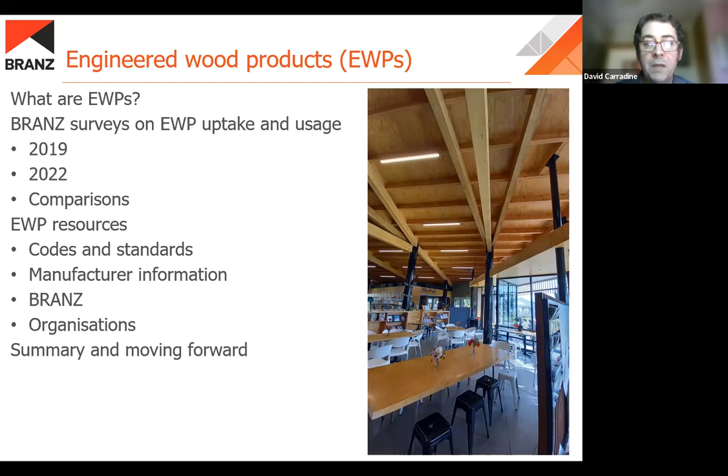We'll talk about current resources in terms of what's out there for engineered wood products, so codes and standards, what manufacturers are providing, a bit about BRANZ and what we've got on the go, and some other organizations that are out there as well. So we'll have a little summary at the end, and a nod to what we're going to be looking at in the future.

It's quite a range of timber composite materials we've got with engineered wood products. If we look primarily at structural applications, we're looking at LVL, glulam, CLT. We've also now got parallel laminated timber, which is like a panel product like CLT, but actually more like glulam done in a panel type format. That's being manufactured by Taranaki Pine, and I think Woodspan is the moniker they're using for that.

And of course there's finger jointed timber, which gets used in some of these different applications. So we've got a range. Some of the industries in New Zealand are quite mature, others are relatively new, but at the moment this is a pretty good snapshot of what we've got available.

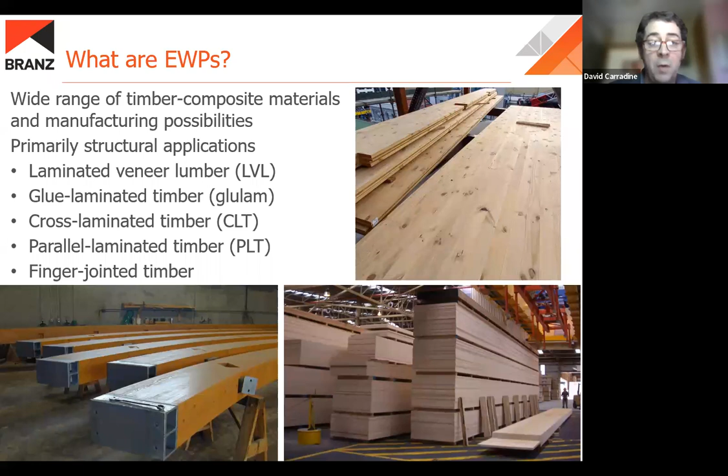There's also panel products - obviously plywood, oriented strand board which is used a bit more overseas but is starting to make some appearances, particularly with some composite products like structural insulated panels. There's strand board, which we do make here in New Zealand, as well as things like particle board and fiber cement. These all have different roles to play, some in more residential type structures, but I'd say they all have a role as well in multi-story timber buildings that we're seeing with a bit more regularity these days.

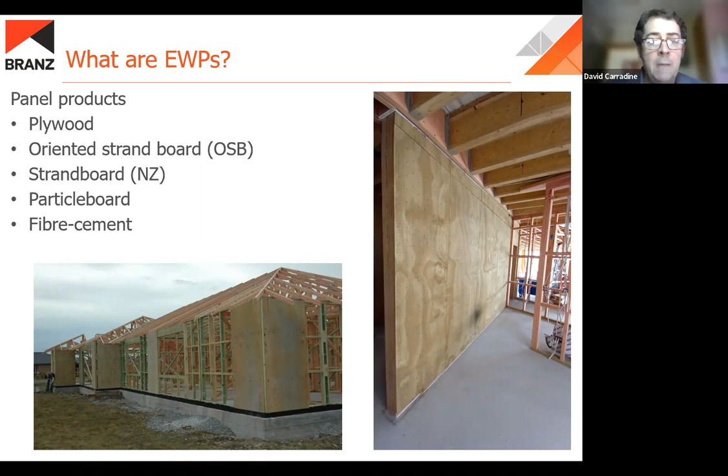As well as the products, we can also put those different products together and come up with products and systems, things like composite I-joists, which I'm assuming you're familiar with. There's structural insulated panels - if you've been keeping up with the TDS webinars, I did one on SIPs last year, and that's an ongoing research project.

There's wood plastic composites - we don't make too many of these in New Zealand, but they do come in from overseas and can have a range of applications. There's timber concrete composites, the PresLam system of post-tensioned timber, as well as a number of different types of stress skin panels and box beams.

Those last three all feed more into prefabricated type systems, even getting to the point where rooms, houses, and modules are being manufactured off-site and then assembled on-site. The different types of prefabrication certainly have opportunities there for using engineered wood products. Prefabrication is taking on a more prominent role in the landscape these days, as more and more people see the advantages of doing as much manufacturing off-site as possible, and fortunately engineered wood products fit very well within that paradigm.

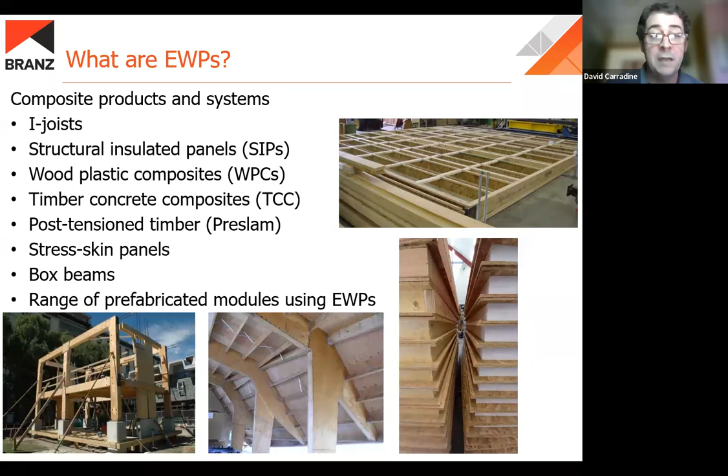So a little bit on these surveys. We did a survey back in 2019 that was reported on, and that was purely a BRANZ-facilitated activity. We got some help from others in the timber area to help with designing the survey and some of that sort of thing, but it was funded essentially through BRANZ.

More recently, in 2022, we did a follow-up to that. It was through a collaboration with the Mid-Rise Wood Construction Collaboration, which I'll talk a little bit about later. Essentially they wanted to replicate the 2019 survey, and in the end ended up getting some funding from BRANZ to do that, so it was a collaborative effort.

The questions were a little bit different, but very similar to the 2019 one. We ended up getting 265 respondents, which was good. We did have to make a couple of pushes for that, but in the end we cast a pretty wide net across the industry.

You can see some of the participants we heard back from in that chart to the right. We had an initial request for participation, and after having the survey open for about a month and a half, we really felt like we needed more respondents. So we did a second round of requests, asking even more organizations. We talked to Timber Design Society, SESOC, building officials and architects, and tried to get as many from the building industries as we could.

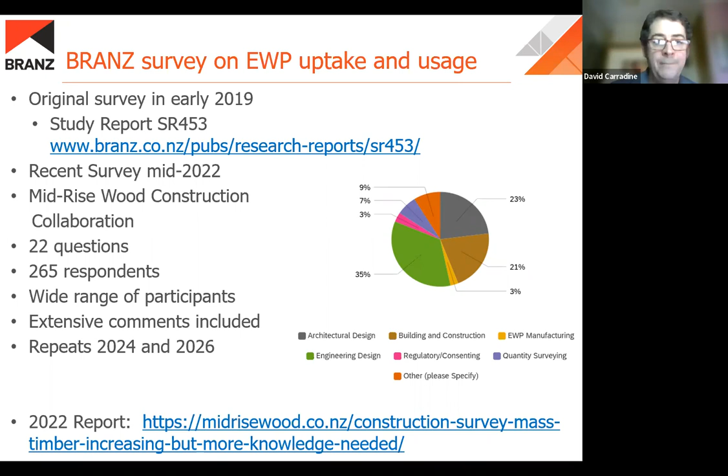As I said, the current, more recent survey was based on the 2019 survey. We tried to be a bit smarter about it. When we looked at not just the questions but also the answers we got, we were able to rephrase them and put them in ways that we think made it a little bit easier to take the 2022 survey, and also easier to analyze.

Surveys are one of those things: if you don't ask the questions in the right ways, the answers you get can be quite difficult to interpret. So I'd have to say we definitely made some improvements, and I certainly found the analysis for the more recent survey to be a bit more straightforward, which is great.

Again, the general theme of questions asked in the survey was a lot about barriers - what products are being used, how are they being used, are there barriers, if you're not using them why not, how can the uptake be increased, and essentially ways we could facilitate increased uptake of engineered wood products.

As I mentioned, we got lots of comments, so there were lots of opportunities for people to tell us what they thought. In the end we had to distill that down into some major themes, and they were very similar to 2019. So in some ways a lot of the things that were concerns back then still exist, but there definitely were some changes as well.

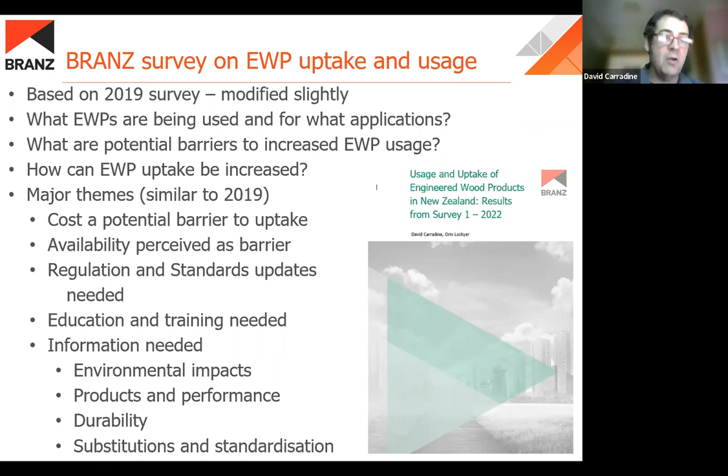The information people talked about, environmental impacts definitely seem to have a much more important, more prominent role, and that's no surprise considering the regulatory changes occurring over the past year or so. But definitely people want to know about the products, how they perform, how they can use them for design. Durability with timber products is always an issue, as well as how they can be substituted, and even some questions around standardization, which other industries probably do a bit more effectively than timber. Those were the major themes that came out.

From that, we looked at it and thought, what recommendations would we make? This was in collaboration with the Mid-Rise Wood Program, where we said certainly developing data on the economic implications of using engineered wood products, comparing them with other typically used materials, with more focus on multi-story building applications, because that seemed quite important in the survey results. People definitely want to know how they performed and how they could be compared, so that people can make more informed decisions moving forward.

Along with the environmental stuff, the comprehensive life cycle analysis and environmental impact data around engineered wood products. Fortunately more of that is coming all the time, but understanding the embodied energy as well as the operational - not just what carbon can be lowered using timber as a material, but also how timber buildings perform over their lifetime. It's getting more and more important to have a good handle on both of those, as well as the carbon sequestered, which for timber is usually a win, but understanding how that works and the different implications of different products.

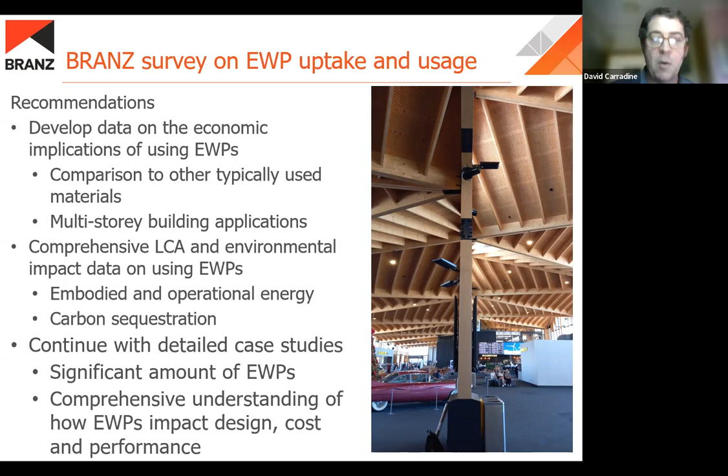What we're doing today, webinars, seminars - fortunately we're able these days to get out and about a bit more. I'm hoping you're all taking advantage of the range of opportunities out there. I know this year in particular there's an awful lot of events happening for timber buildings, so that seems to be happening in the background anyway.

In terms of recommendations, trying to engage with a wide range of building sector players. Sometimes it feels a little like we're talking amongst ourselves, that we're already all behind timber, but we need to widen the audience a bit and talk about specific applications of engineered wood products, demonstrations - not just case studies, but the tools available, and even guidance on using those tools, and sharing case study findings, which from what was said about upcoming webinars, is also happening.

Looking to the general public, building owners, end users, developers - folks that may not have timber on their radar as much and aren't already convinced, those are the ones we really need to try to share this information with. That's when having cost information and comparative data can be quite useful, because if people ask what's the difference between timber, steel, and concrete, having some of that quantified can be quite important.

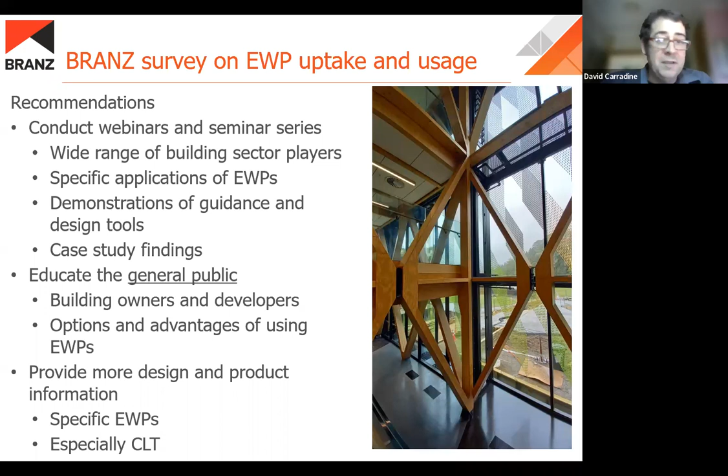So along with more design and more product information on specific products, the thing that bubbled up in the more recent survey was definitely CLT was seen as something that needed more information, more design tools, and people just wanted to know more about it.

Comparisons - I've already kind of mentioned a number of these, but the themes were essentially the same: cost, availability, standards, regulation, and the whole education and knowledge aspects. Those didn't really change that much, though I think the degree to which some of them were critical has shifted a bit.

There were fewer respondents, as I mentioned, with the more recent survey. The demographic shifted a little bit. The previous survey had more architects, whereas this time around we had more engineers.

The case studies, as I mentioned, do seem to be helping inform people. There weren't people saying we need case studies, they were saying we need more of them, and we need them to be a bit more specific or a bit more targeted.

Certainly the environmental stuff was more important in the more recent survey, and training was more of a focus. So not just information, but how to use the information, how to use the design tools, and where it makes sense to use - and maybe even not use - engineered wood products. So training was more important.

As I mentioned, CLT has obviously grown, the interest there has grown. And there was more of a focus on trying to get more research and education at the university level - training people for the various roles that might be needed: architects, engineers, quantity surveyors, and builders even, at the university level, so that when they leave university they already know about timber and can maybe get involved with the research as well. So those were some of the differences. Definitely a lot of similarities, but with some of the details a little bit different.

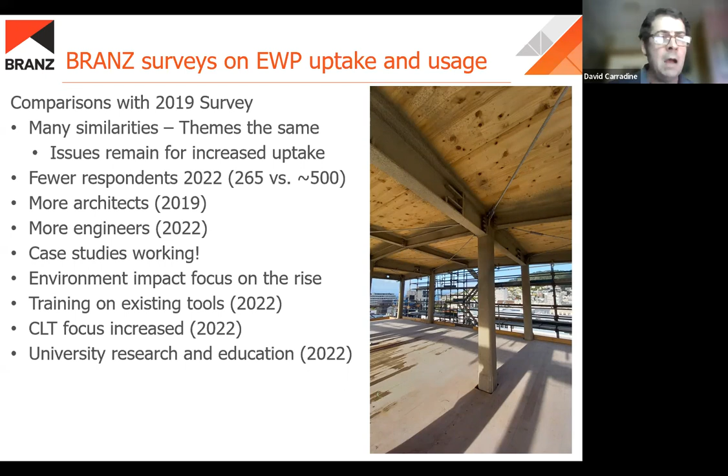So what have we got out there in terms of resources? I think most of you will be familiar with our existing codes and standards. 3604 is undergoing revision currently - they have expanded the scope a bit, so that's going to be important.

For 3603, obviously we have the new 1720.1 published. It's not cited in the building code, but it will be. That has already been the topic of discussion for a couple of webinars - I think Pierre was talking about connections last month. So if you keep your eyes open, there will be more on the differences. And as that becomes cited, it will also become more important to get some training around that as well.

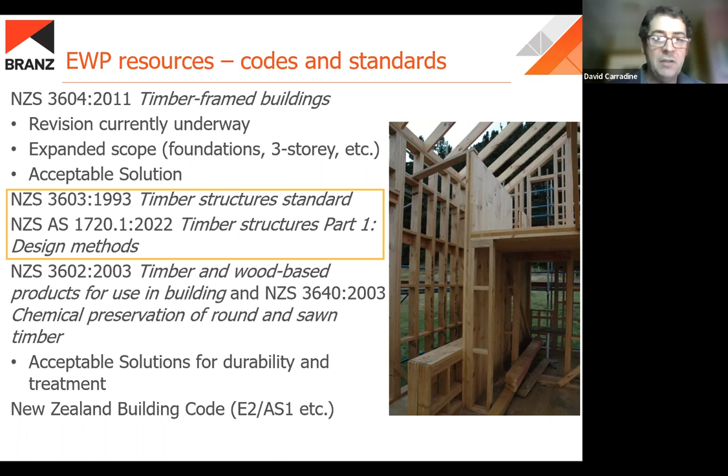Unfortunately, 3602 and 3640 did not get revised, but in terms of durability they're still the go-to, and the ones we've had since 2003 are still current. And there's the building code as well, so there are shifts there to keep your eyes on, whether it's claddings, moisture, fire, or insulation - that's obviously a big one getting looked at now. So those are the things we haven't covered, in part of the regulatory framework.

I didn't want to be product specific, so I just wanted to note that the various fabricators and manufacturers of products we have in New Zealand have lots of technical literature. If you're not sure how to work with a particular product but you know what you want, get in touch with them - they have tables, carbon information, durability information. Some of them also have design software aimed at different levels, whether you're quite an advanced engineer or just getting started.

So there is a lot out there from the manufacturers. It's important to them that people know how to use their stuff properly, and they're quite good at getting that out there. I didn't list anybody in particular, but that goes for the engineered wood products, but also components - the fixings, the fastenings, the bracketry. They also have literature, software, and even overseas companies are working to make sure they have New Zealand specific information. So another opportunity to design within the framework of what's available.

Also, for those products that do have things like CodeMark or BRANZ appraisals, they not only have technical information, but can also help explain how those products fit within the building code compliance pathway. So it's another opportunity that goes a little beyond saying, yep, that's the shear capacity of those screws, to saying yes, and they will also perform as they need to over the long term, or whatever happens to be.

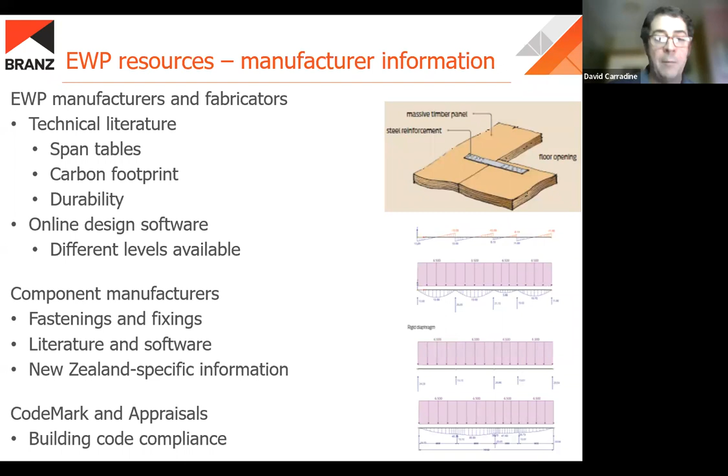Just carrying on more resources - obviously, me working at BRANZ, I've got a pretty close relationship with what happens there. The website has been updated, and there's lots of publications, tools, and calculators. The original 2019 survey report is there, as well as a range of life cycle carbon evaluation stuff, and of course research, which is what I focus on.

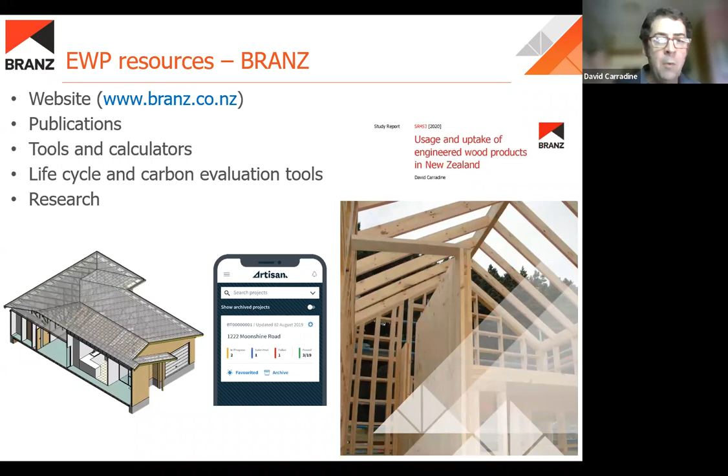I won't spend too much time here, but there's a range of stuff available. The study reports are more for the research end of things, and they also do what's called a Research Now, which is a 2 to 5 page summary of a research report. So instead of reading 200 pages, you get a nice digestible summary that gives you the highlights, and from there, if you need data, you can go to the report itself.

They do bulletins on a range of topics related to timber. I pulled out the timber related things, but there's a new one this year on engineered wood products, and it's pretty high level. If you're already well familiar with engineered wood products, it may not be that useful, but if it's somewhat new to you, it might be helpful. It's always another resource we can point to when trying to share the story about timber with people.

There are some design and building guides as well - the multi-story light timber frame guide that came out in 2019, as well as guides around selecting timber. If you're using 3604 or doing light timber framing, there's also the engineering basis of 3604, which is quite a useful document.

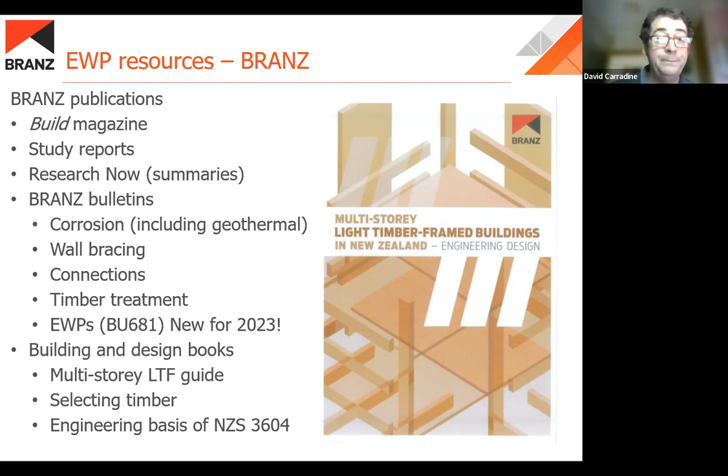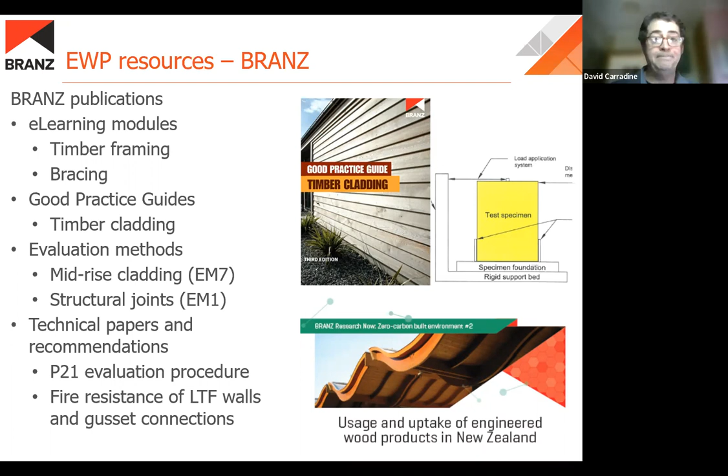And of course, P21, which we're aware is for bracing evaluations for use with 3604. There's also technical papers around fire resistance, and some of that is timber specific. The list sort of goes on here.

I guess what I get to is also looking at seminars and webinars. I get involved with those, but we also have folks that look at various aspects of buildings. So for timber buildings, it could be the type of timber, it could be bracing.

There's currently a medium density housing roadshow underway - I think there's still a couple installments to go - but that's looking at timber, rather medium density buildings in a bit broader context. A lot of it's around a book by Guy Marriage from Vic Uni called Medium, and it's got him as well as a few other folks, including one of our fire engineers, talking about the various issues with medium density housing and how to work through some of those.

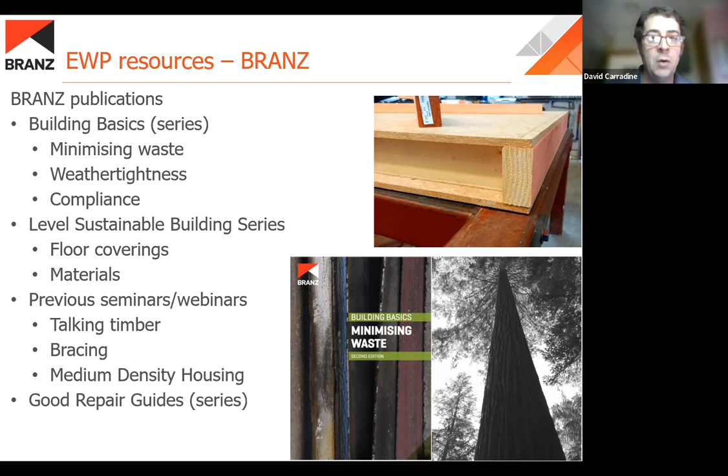I'd say probably over the years, we've done a lot at BRANZ around houses, so that's fallen into the timber area, but more and more multi-story and commercial buildings are also becoming part of our work streams, research, documentation and publication. So it's all kind of moving in that direction as well.

There are some tools and calculators, with a number of maps there for different aspects of design. We used to have a lintel and beam calculator that actually would provide a PS1. Due to some different software issues, it's essentially just a spreadsheet now, so it's something that will help you with the design, but in the end the sign off will be up to you or to your engineer.

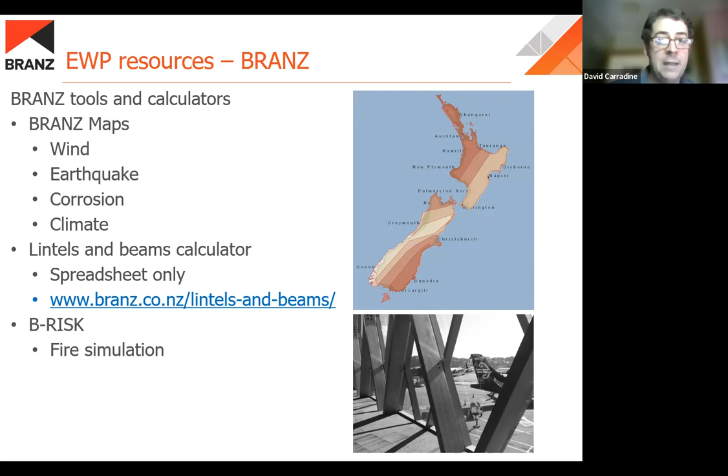And there's also B-RISK, which is a software fire simulation tool - I'll talk about that in a minute. I did a presentation for TDS last year on the various life cycle analysis tools we have at BRANZ, so I won't go into much detail there. What I'd say is they're all available on the website.

They're free. LCA Quick is the big one that looks at whole of life evaluation. It's based on EPD, or environmental product declaration data. It gets updated, and they do provide training, so if it's something you think you want to use, there is help available. LCA Quick provides a lot, but it's for the scenario where you know a lot about your building and you're at a point in the design where you've got a BIM model and know what materials you're going to use. So it's one of those things you use a bit further down the line.

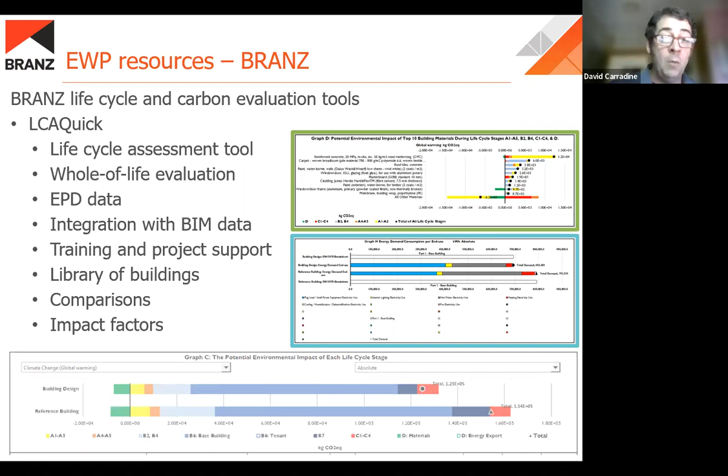That was acknowledged, and what it meant for BRANZ was that they needed to develop some other tools that could be used at different stages of design - maybe not when you know it all already, but when you're trying to figure out what you want to do.

Do we want to use timber? What kind of timber? What kind of products do we want to include? Some of these other tools that I've got listed here can help with some of that decision making.

There's preliminary tools to compare different systems. A lot of these look mostly at embodied energy, some residential, some for bigger buildings. So there's a range of tools, all pretty well described there, but there's a good range now beyond just LCA Quick to help with some decision making.

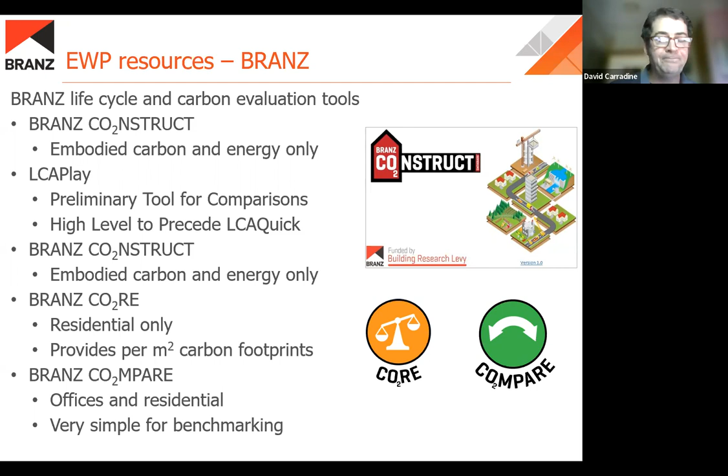We also have a program on environmental transitioning to a zero-carbon built environment. Programs are collections of projects, so it's intended to support the industry to lead their own transition. There's resources available, opportunities to get involved, and a website as well as an email there if you want to find out more. The whole idea is aligning with MBIE's objectives about reducing our carbon footprints and leading the industry to help themselves do that.

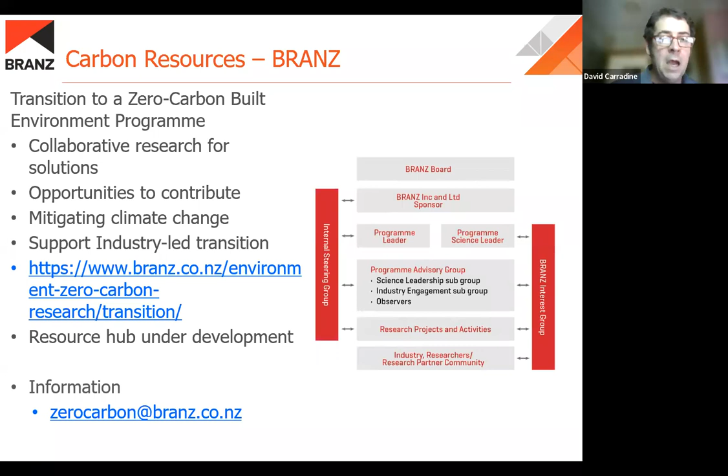We've got a big fire program and end up doing some fire or timber specific things at BRANZ at times. There's B-RISK, which is just software. It's constantly updated, has been in use for quite a few years now, and continues to get pretty good traction. There's some recent enhancements where you can evaluate mass timber, different timber surfaces, and how that contributes to your fuel loads. It looks at growth, fully developed, and decay phases of the fire. So it's pretty comprehensive and also includes some charring depth info. Again, it's not timber specific, but it has the ability to be used for timber buildings.

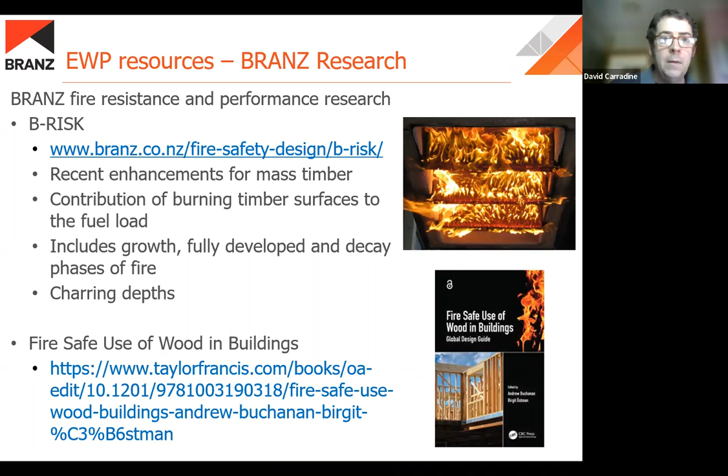You may be aware that there's a global document now on the fire safe use of wood in buildings. Andy Buchanan and some others from New Zealand contributed to that, so quite useful there, and BRANZ also supported it. It wasn't a BRANZ document, but we were certainly supportive of it. That's for the environmental program I mentioned.

We also have a densified housing program in the fire department that looks at things like the fire safe use of timber, helping further define calculation models for mass timber. There was some work done with UC on post-tension beam column connections, with full-scale fire tests done there. And also some work around timber linings and early fire hazards, combustible facades, and the contributions of timber to external fire spread. So a couple things around cladding and the interaction between timber framing and cladding are ongoing projects.

I'm excited to say that we have a new fire lab being constructed as we speak, and we will be able to do full-scale facade tests inside, whereas now, as you can see from the image there, we do them outside. The website listed there has a lot of these projects, and it's probably one of the best parts of the BRANZ website - the fire research folks have put together a good summary of their work. So I encourage you, if you have some fire issues you want to consider, check it out.

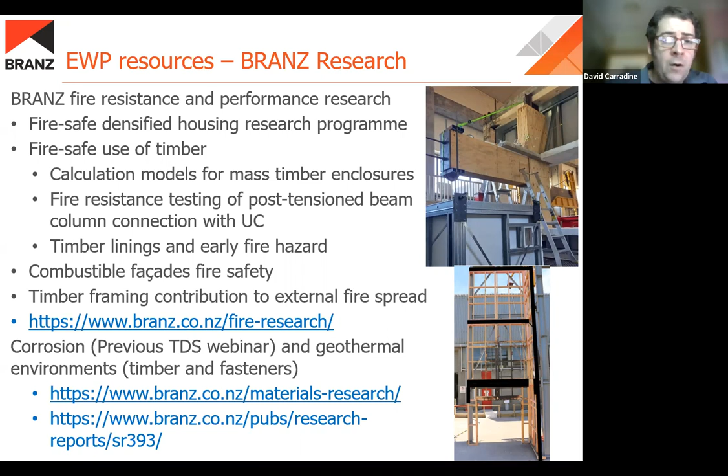Also, some work on corrosion. I won't dwell there because Zhengwei did a webinar for TDS on that last year as well, but that's another area we look at.

For materials, there's adhesives, durability of timber, things like what's going on in wall cavity and subfloor spaces, as well as looking at some of the different products, so thermally modified timber, and how we can evaluate how effective some of that durability has been. All of those have either build articles or research papers that you can check out.

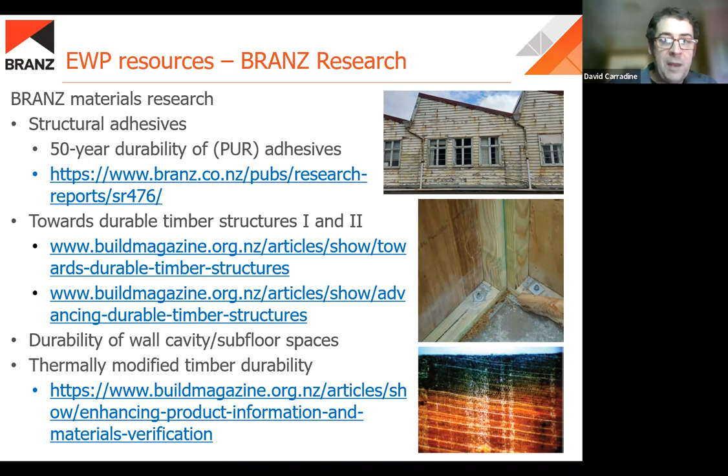And of course, would have to mention the structural stuff. There's SIPs, which I did a webinar on for TDS last year - a lot of these things have been discussed. There's that multi-story light timber frame guideline, and we're currently working on some hybrid light timber frame systems, in conjunction with either CLT, LVL, steel, concrete, different foundations, that sort of thing. And also a bit of work getting started on sloping site foundations, particularly around Wellington. That's a much more residentially focused project, but essentially trying to come up with some guidance for subfloor remediation, that sort of thing.

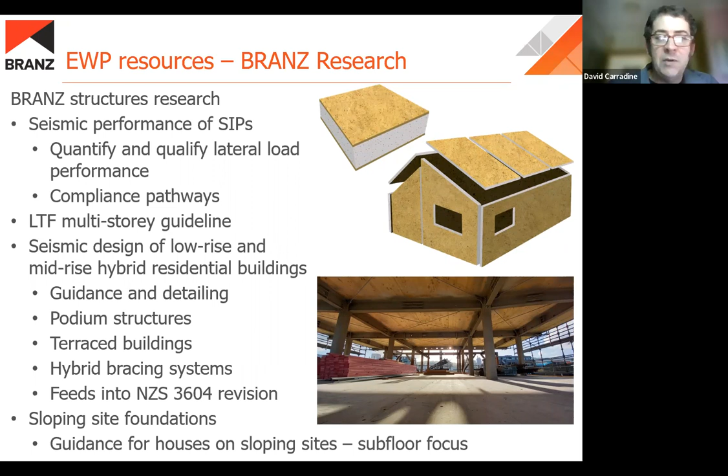Andy's guide is still in use, still relevant. It was based on 3603, so obviously with the new standard, some things will change there. Whether or not that is going to be revised or updated, I'm not sure at this moment, but certainly watch that space.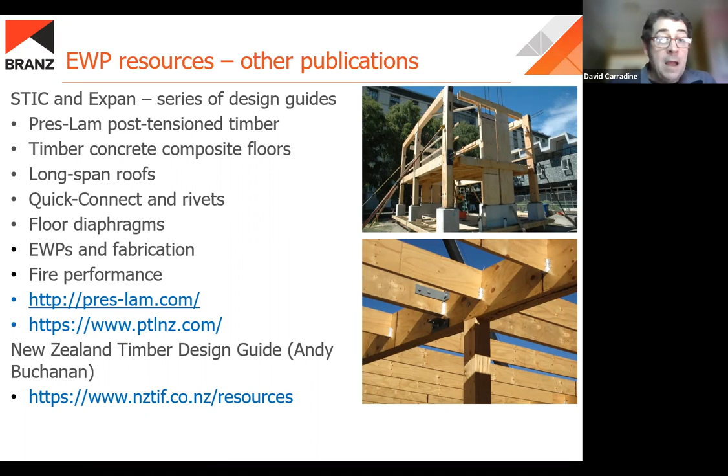The universities also do quite a bit with timber. University of Canterbury has done a lot of work over the past few years, looking at different aspects of CLT. More recently, they've been looking at base isolation of houses, and some of this will be discussed at the upcoming NZSEE conference next month. Similarly, with Auckland University, they've looked at CLT floors and different seismic dampers, but also LVL, holes, notches, reinforcement of those kinds of systems, as well as wood waste and reuse of timber, so looking in that environmental space as well.

AUT, the resilient slip friction joints, so the Tectonus system and how that integrates with timber buildings has been a focus. And I mentioned Vic University as well here in Wellington. They've had a number of projects on prefabricated engineered wood product systems. The one that comes to mind is the X-frame that Jed Finch came up with, but also the work by Guy Marriage, as I mentioned, was a focus for the recent medium density housing roadshow that BRANZ is doing. So there is some work going on there as well. I guess it's more in the architecture space, but still very relevant.

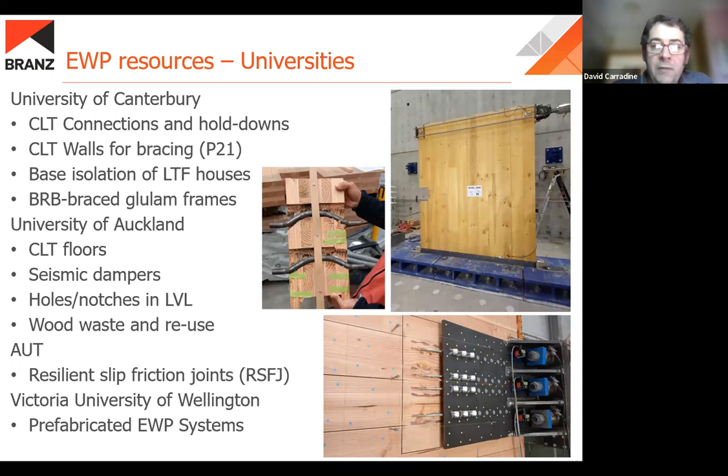Probably don't need to say too much about the Timber Design Society other than the website is being updated now. Obviously you're familiar if you're catching this webinar, but there's also the journal, and over the past couple of years we've introduced tech notes, which are intended for practitioners. There was a roadshow last year - hopefully you were able to catch that, and there will be more in the future. And obviously the webinar series has been very successful.

So WPMA also has some resources. They've got the series of design guides - there's 15 or 16 of them, and they are available for download, as well as they have info on the EPDs, the environmental product declarations, which feed into those different environmental footprinting calculators that are out there. So a couple different resources there.

I guess one of the most exciting things is the Timber Design Centre. I do think that Robert Finch did a webinar for TDS last year talking about it, but it was a collaborative effort between TDS, BRANZ, Scion, WPMA, and funded through MPI, basically trying to look at all things timber and share knowledge and create a bit of a one-stop shop for information around using timber in buildings. And they also have some advisory capability as well.

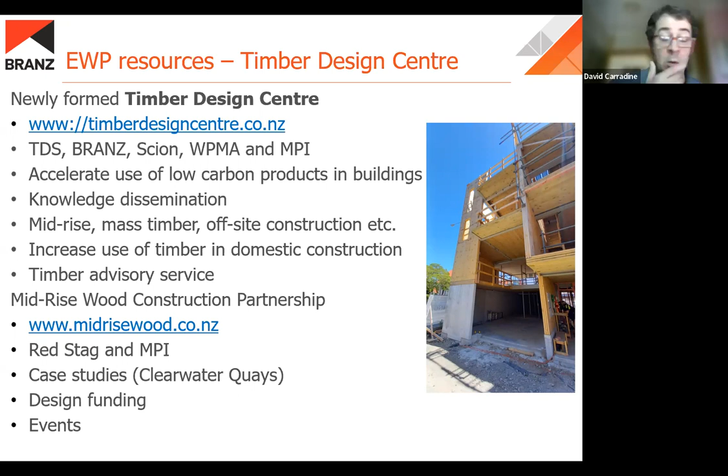And they also are doing some events. I think even next week or the week after, there will be a Woodworks event down in Christchurch, and then there will be one later in the year in Rotorua as well. And that's where Woodworks comes into it. You're probably familiar with Scion - they tend to work more in the durability processing space, but also environmental issues and innovating things that we can do with timber.

So Engineering New Zealand also has technical groups, obviously TDS, but SESOC, NZSEE, and the general practitioners. Again, those aren't going to be timber specific, but there's more and more engagement and collaboration happening with those groups as well.

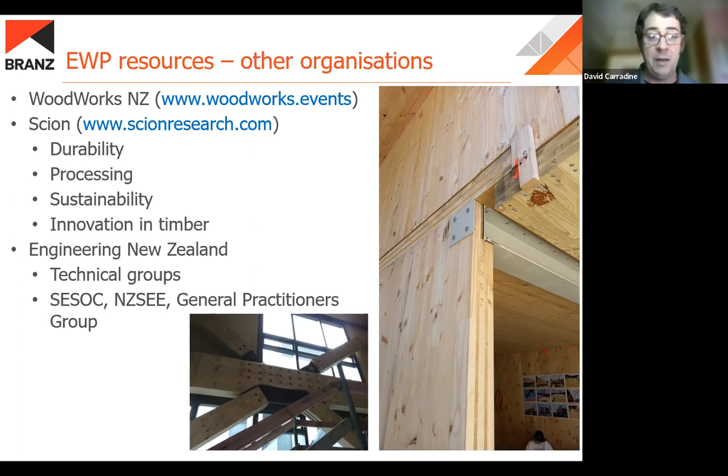Also, we often find that if we don't have a New Zealand solution for some of our timber design aspects, there's a lot of things going on globally. Here's a few organizations - I know that for the multi-story light timber frame guide, we definitely tapped into some of these resources, and they're very useful. So a lot of things going on globally relate quite well to what we're doing here in New Zealand, and sometimes it's just a matter of knowing what's out there. So just wanted to share some of these overseas opportunities as well.

And obviously Wood Solutions next door in Australia, they've got lots of design guides, and they do a webinar series as well - definitely a good place to look for information. So just in brief, talked about the survey.

Clearly, there are some areas for improvement, and I think the resources and the things that are happening are already moving in that direction - the webinars, the road shows. My opinion is that there is an abundance of resource. It's just a matter sometimes of connecting the people who need the information with the people that have it.

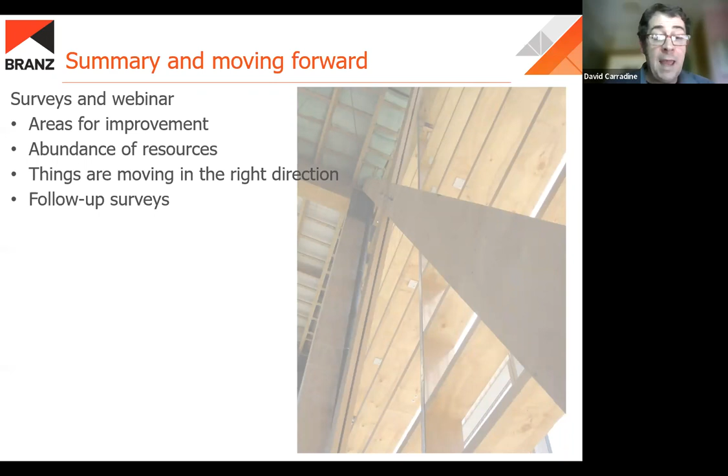Hopefully Timber Design Centre, Timber Design Society, as well as the other organizations can help with that. There will be follow-up surveys, again, trying to capture more longitudinally what's happening. But with that, I would say if you're able to participate, please do. And thank you for your attention. If I can answer questions, just let me know.

Thank you very much, David. That was really very thorough and very interesting talk - a massive effort made to collate results from the industry about engineered products such as LVL and glulam. That's really helping students, helping engineers, helping university, everywhere. It's a massive effort. Well, I don't know what to say, to be honest. Great effort.

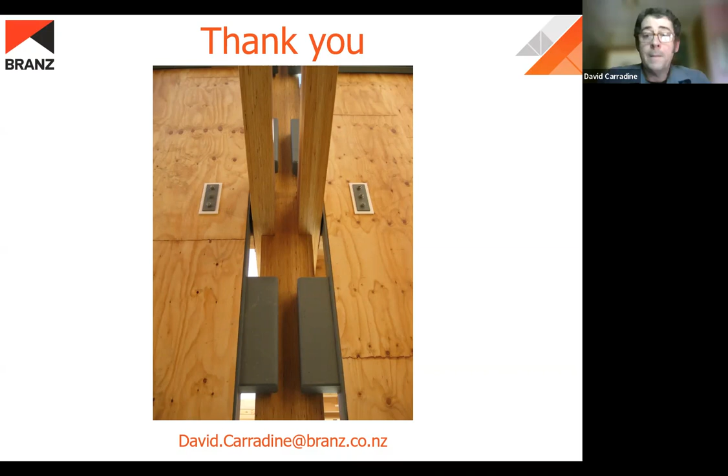Well, thank you, David, again for the presentation and for the Q&A session as well. We have covered all the answers we received from the audience.